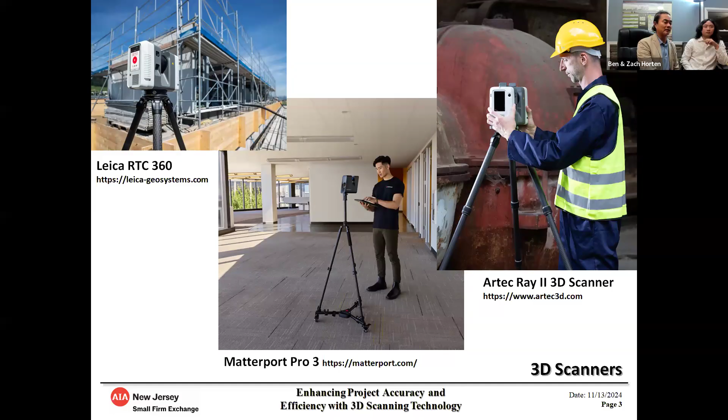Once you buy the scanner, there are various platforms available that make what's called twins, virtual twins. I think you may have heard of it, and I'll explain what that is a little bit more. There are companies like Matterport, Giraffe 360, Hexagon, and 3D Vista, and a whole host of other websites.

Giraffe 360, I'd say, is a little bit more popular in terms of the real estate world, where you could take a less robust 3D scanner and create that 3D tour, virtual tour that you see on real estate websites. A lot of times, if you go to realtor.com, you'll see certain houses or apartments that have the virtual twin you can walk through and see the entire space. That's hosted by companies like Giraffe 360. Matterport actually does the same thing too — they host a twin, and we'll show you an example of that.

Hexagon is, I think, more industrial grade type of stuff where they have scanners for scanning minutia details of equipment and things like that, as well as scanners you could use for scanning buildings. I found their services for architecture seem to be a little less comprehensive on their website, so I never really investigated too much with those guys.

3D Vista is one of the many companies that takes 3D scans, takes a cloud file, and converts them into a virtual tour you could have on your computer. You could actually walk through the space using their software, like a virtual twin of your building. But they don't have a hosting website where you can have a cloud file, like going to realtor.com and walking through the space on your own. You'd have to find some sort of hosting website to do that.

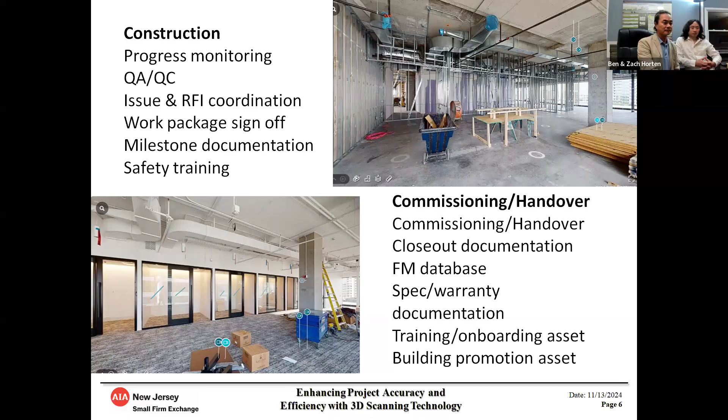I think that's kind of the quick overview of the technology, which I think is basic. It's a 3D scanner - there's all these benefits you can have for as-built as well as design phase, construction phase, post-construction phase. If you think more about it, there's a lot of benefits you can gain from that.

But today we want to spend the time going into showing you what a twin looks like, what a cloud file looks like, and the steps we take to take that scan, bring it to the office, and go through the steps of making it into an as-built floor plan.

What you're seeing again, on the top left corner of the image is a virtual twin, kind of the dollhouse view. On the right is an actual cloud file that's been imported to a software where you can review cloud files for drafting purposes.

Most commonly used software for bringing the cloud file in and drafting and tracing out the building plan is Revit and SketchUp. Our office uses SketchUp - we find that to be a little bit easier to train people on, so we've been exclusively using SketchUp. We're going to focus on how we import it into SketchUp and then go through the process of drafting.

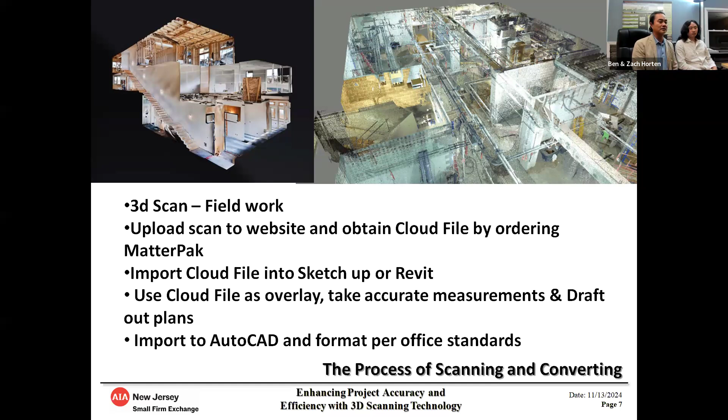Once we draft it out, we typically import that file into AutoCAD and format it for our office standards to create a nice set of floor plans. So we're going to walk you through and talk about 3 different projects we worked on.

This is an 80,000 square foot office building. It's a 4-story office building. If you can imagine how long it would take you to hand sketch out that entire space and create an as-built floor plan out of that, that's something we're going to show you.

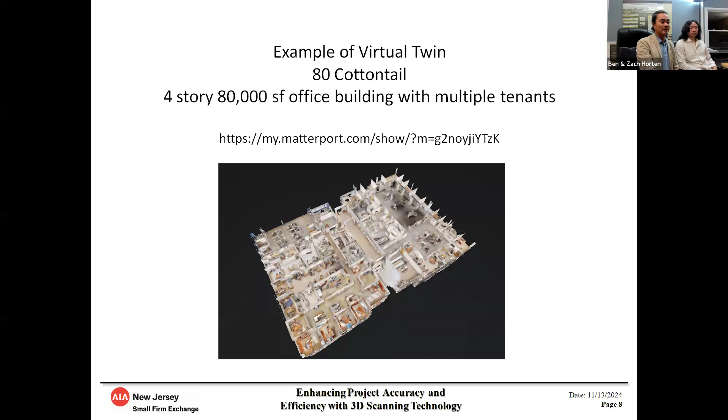So we did order what's called a schematic plan service that they provide. Believe it or not, each one of these floor plans costs about $15 a piece to order, so it's very cost effective.

Another project is a 2-story office building, 5,600 square feet. This one is a good example because the floor plan—this is something I found interesting about the 3D scanning.

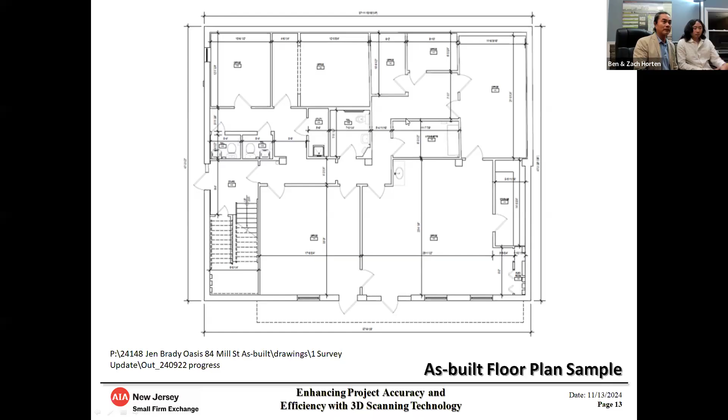I think twin is a good place to start. So let's start with the 80 Cottontail. This is what we refer to as a virtual twin—a 3D scan, and it's a virtual walkthrough.

Why don't we walk around the space a little bit? As you walk around, look up—could you look up? See all these ceiling details there? You can see all the details. Look down, you can see all the materials. If you do a good scan job, you could literally capture almost every little nook and cranny.

Keep on walking around. As you can see, we took multiple scans throughout the space so you can even go into that closet there. So you can see as you look around, we captured every little detail, and you can imagine once you go out and go back to that kitchen area.

You could tell looking at that window, look at the curved ceiling details, right? Imagine if you had to try to figure out how to measure that while you're on site. Look, there's these soffit details, window pockets. You can see the baseboards in certain locations. All those little things, it'd be almost impossible to pick up all those details if you were hand measuring those, unless you took an extraordinary amount of time.

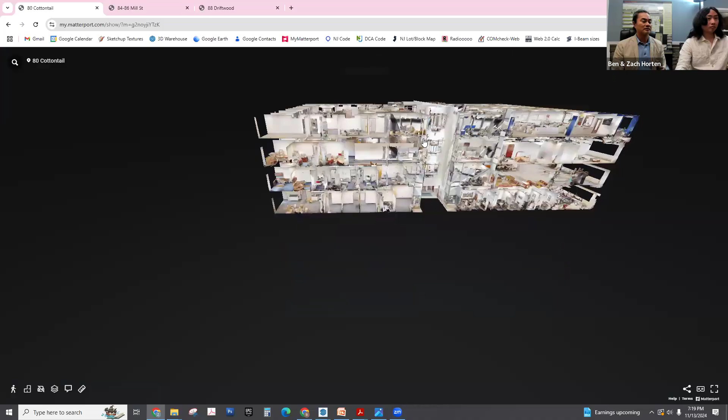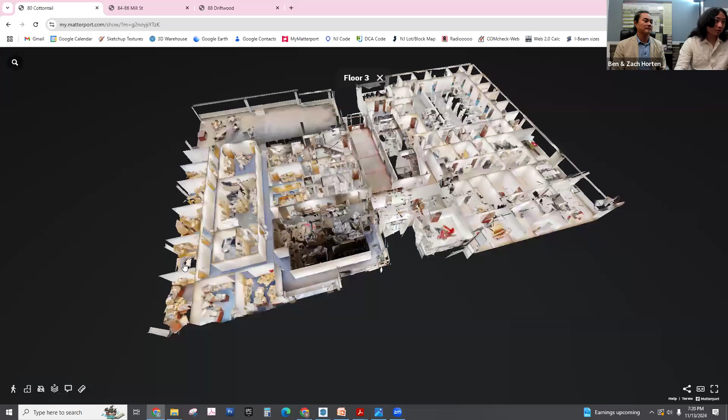And then why don't you show us the dollhouse view. So this is the same model. You want to explain that new feature that they added about the furniture? Yeah, so sometimes the spaces we go to are pretty cluttered. So let's see, this floor here, the entire room was filled with boxes, which makes it hard to sort of zoom in, see what's going on in there sometimes.

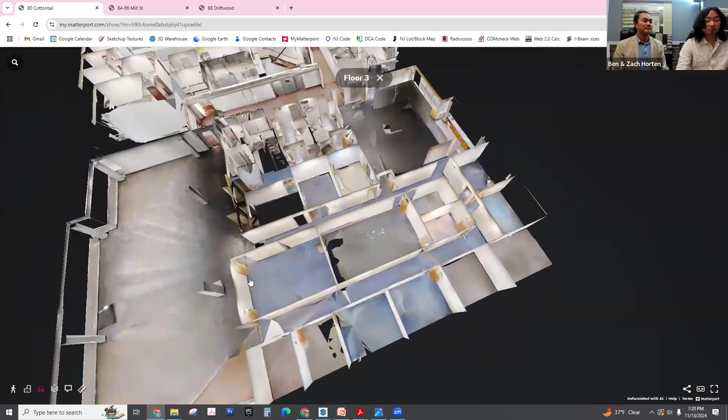One of the tools Matterport is currently testing is a tool to hide the furniture. So if you toggle this right here, you can see it cleared out all of the boxes in these rooms, which gives us a clearer view of the layout. Yeah, so this twin, and then why don't you zoom in and go into one of those rooms now? Yeah, it actually got rid of the furniture, right?

Could you turn the furniture back on now? Yeah, it's like magic. All that clutter. Why don't you go to one of these? Yeah, see all the clutter in that room? All right, there's that room. Let's take the

Yeah, it's like, what's that commercial where they make all the garbage disappear? Yeah, you just point to it and it disappears, and this is what it's doing. I mean, just technology at its best, I think. Yeah.

So you can see, this is like a 4-story building. We scanned all 4 floors. It stacks it, so you're able to measure the floor to floor height pretty accurately because it 3-dimensionally scans it. And we scan the stairway pretty in detail so that 3-dimensional measurement is accurate as well. So you could get pretty decent floor to floor heights.

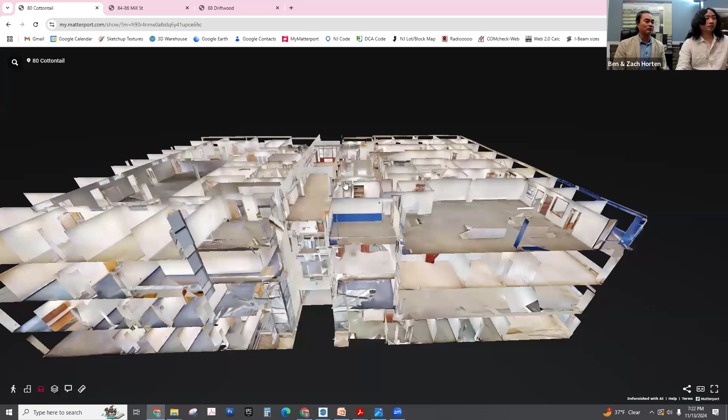Again, when you walk the space, you saw the ceiling, so you could actually flip this and just look at the ceiling layout also. So we use it to also create a reflected ceiling plan as well. But you can see the stairwells. Why don't you talk about the process of scanning and what you do to get an accurate scan and some of the nuances that you should be aware of?

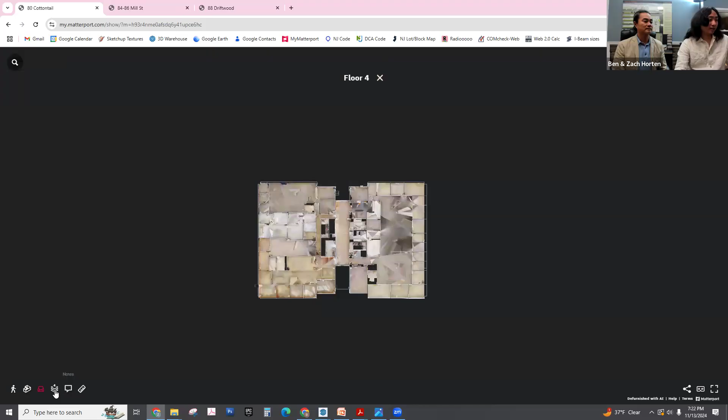Yeah, so when you're scanning the space, since it's scanning in all directions, you have to pay attention to what's above you and what the camera can see. So if we're trying to figure out how deep these cove lights are, you have to make sure the camera is positioned far enough back around here to capture all the surfaces. Yeah, capture that back surface, the ceiling, and these.

And the doorways, sorry. Yeah, you have to actually go into the doorways and set the scanner up in multiple positions, so you could capture all sides of the door. If you want to get that door jamb accurately, you got to scan both inside the door and outside the door.

You don't have to if you were doing just a virtual twin, let's say just for quick touring purposes. A lot of times realtors, they'll go into a room, maybe set up the camera in the middle of the room and do one scan. And that's enough for people to be able to look around, see what the room looks like. But for architecture, you have to be able to capture all the little dimensions.

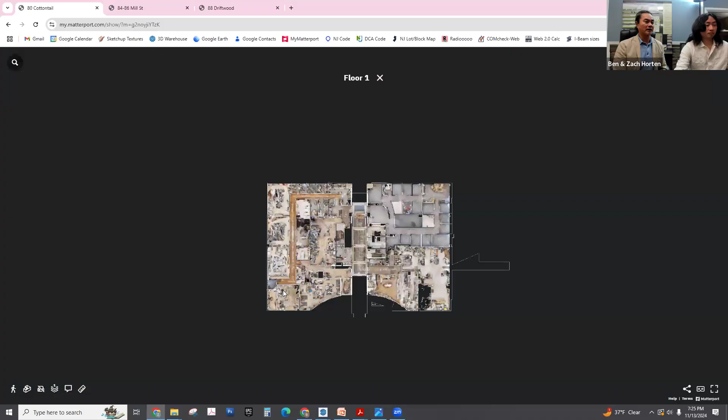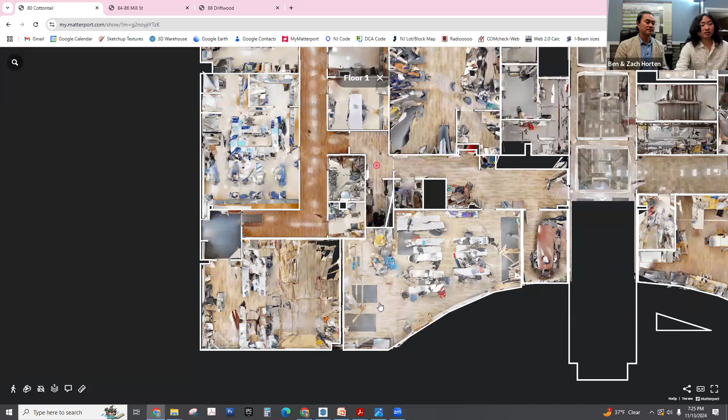Yeah, so you go through and do the scan. Once you do the top-down view now, so if you look at the floor plan, how many scans do you think you did in each one of these bigger rooms? In these bigger rooms, I took about, I think 8 for this one, since we had all those ceiling details in here that we had to be mindful of. Yeah, so you went around the perimeter of the room to capture all those three-dimensional aspects of the exterior wall, right? Yeah. And you took those extra steps just so you could capture those extra details, right? Yeah, so you have to position the camera to be able to capture this pocket in here.

Hey, could you do that magic of turning off the furniture? I want to see what it looks like in here. Yeah. Ooh, got rid of some of the walls too. Yeah, so some of the stud walls disappear, looks like, but that's pretty cool.

Yeah, so in some of these bigger rooms, to capture all those details, like one side of the mullion to the other side of that mullion, because you were able to scan both sides of that mullion, we could actually get a cloud file that shows you the exact measurement of that mullion, right? Yeah. I hope you guys understand that, to get that mullion, instead of having to measure every single one of those mullions, because you scan both sides, now you have a three-dimensional scan of that mullion that when you convert this to a cloud file, you could actually go in there in your software and measure the dimension of that mullion. And you could get an accurate measurement of the height of these mullions, the window heights and things like that.

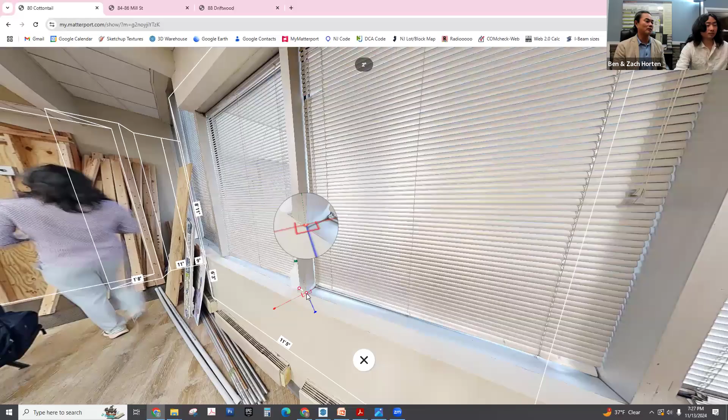The twin model is actually good because with this virtual twin, you could actually do some measurement as well, right? Could you show that feature here? So you do the measurement tool, and it gives you some basic measurements, but you could actually measure from one point to the other to get an approximate measurement. Now, these measuring tools, I found out it kind of rounds off a little bit. So it gives you a good general sort of dimension. So approximately the windowsill, you might be able to say these are like 4 foot 6 inches wide, from mullion to mullion. But they do round off on this part.

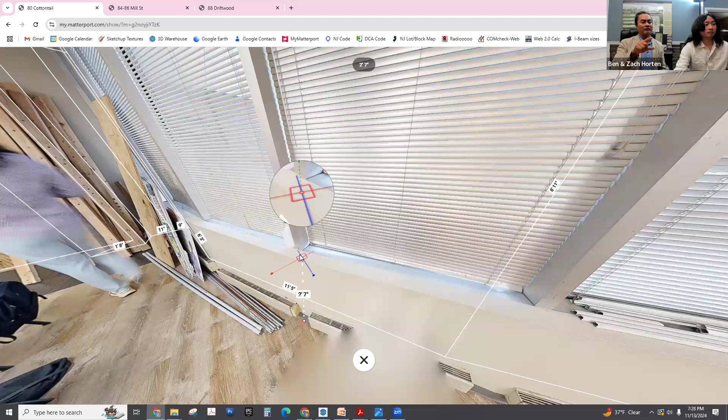But the cloud file, it's accurate to almost like a 16th to 1/32 of an inch. So on the cloud file, it's much more accurate. Whereas in the twin, this is just giving you a good estimated dimension rounded to the nearest inch or so. So this is an interesting tool to have. Okay, so why don't we go back to the plan view?

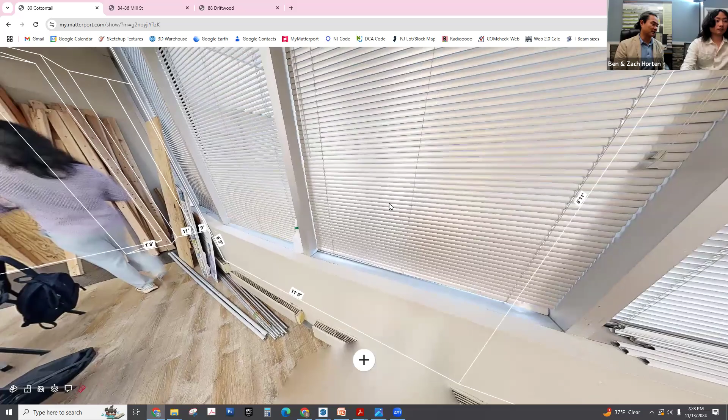All right, so you can see the benefit when you do these scans. Each one of these scans, can you tell them how long it takes? Each scan only takes about 15 seconds, excluding the time it takes to move it around. I found that working in a team helped a bit because you can have one person just moving the camera around while the other person keeps out of the way and starts the scans. Mm-hmm. Yeah, so on a larger job, you could do it with one person. Sometimes we've been doing it with two people just to test it out, doing it both ways.

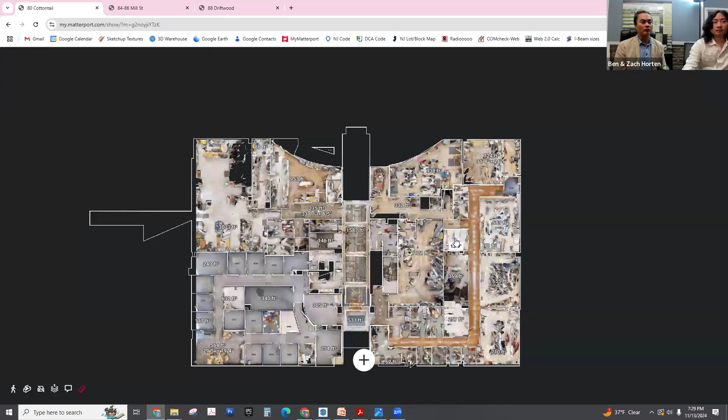But this project was a 20,000 foot floor plate times 4, 80,000 square feet. And how long did it take you to scan the whole thing? 3 days. 3 days of scanning. I think comparative to what it would have taken if we were to hand measure everything and sketch everything out, on top of the fact that we probably wouldn't have been as accurate, my guesstimate is that it would have probably taken us at least over a week to field measure, field sketch, and measure out everything. And most times, with a building this size, we would have gone back a lot of times because we would have missed a lot of things. So I think there's some benefits there.

And you know, like I said, the twin is great because you could actually provide this link to a website. It's like a hosted website that's on the cloud, so you could provide that link to your client, and then your client could kind of walk through the space themselves and look at things. The contractors could look at things too, like an as-built condition when they're bidding on a project, and look at what's there, as opposed to having to go to the site itself. So I think as we progress, people are going to see more and more benefits to using these twins.

Now, why don't we jump from this one? I'll give them an example of the house, the driftwood house. Now, go ahead. So this is a 3-story house. And again, you're looking at the dollhouse view of it, but why don't we start from the street and kind of walk us through the house real quick? Yeah.

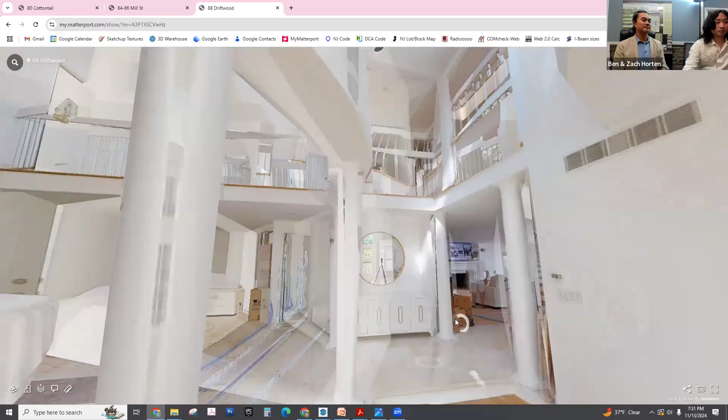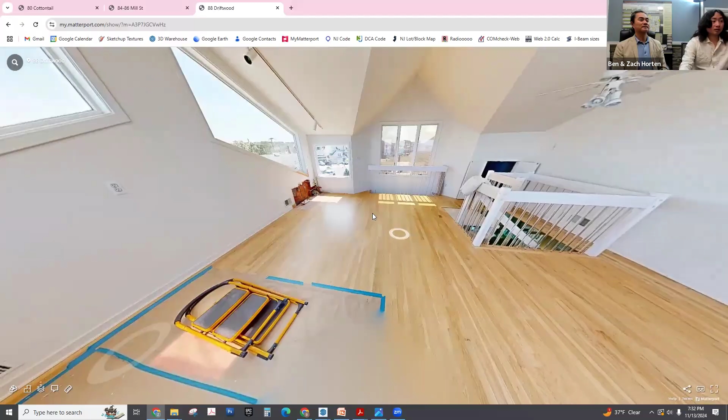Normally 3D scanners also have trouble with these mirrors, since it ends up perceiving the space to be a lot larger than what it is. So the thing that's also helpful with Matterport is they have a tool that lets you mark the locations of these mirrors, and that helps a lot with the accuracy of the scans. So all those circles are scan points, right? Yep. It was hard to get the scanner to fit on these stairs.

What did you tell me about doorways? Like a lot of times when you scan, you want to scan with the doors open so you could get the wall thicknesses too? Yeah. One of the scanning practices is to scan on both sides of the door. So that way you can get the location of these edges of the door, and then when you get this combined with the opposite sides, that allows you to get the thickness of the walls more accurately, right? Yep. These closets, you can figure out the size of the gap that's between them fairly quickly.

Yeah, when we field survey, we always measure the jamb dimensions on both sides of the doorway. So make sure the chase walls, if there's any chase wall, we could find those. A lot of times it's hard to tell if there's a chase or not. But I think if you do a good scan, it picks up all those things that you didn't really notice when you were at the site. Mhm.

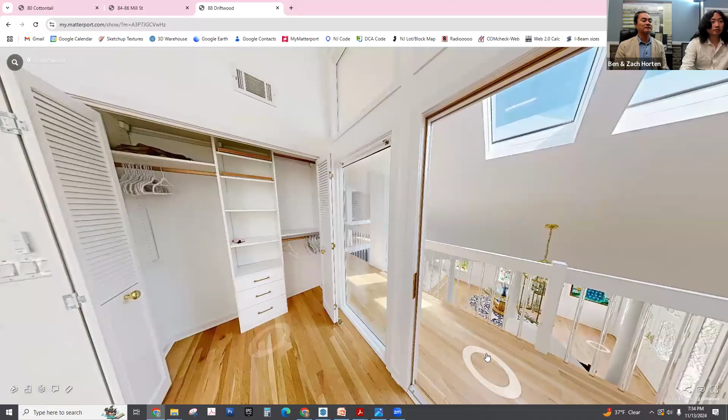Now let's go to the cloud file. So since we looked at 80 Cottontail, which was that 80,000 square foot office building, we're going to show you what the cloud file looks like. And can you explain the process after you scan? What do you do with the file, and then how do you get it into the cloud? Yeah. Okay.

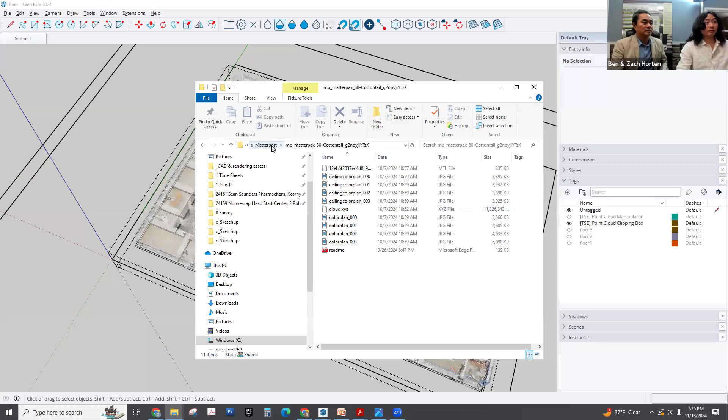So when we get the cloud file from Matterport, it comes in a format called XYZ. Let's see, show them the folder. Okay. This one. So yeah, it comes in as this XYZ file, which contains all of the 3D data. But since that doesn't natively work with SketchUp, we have to convert it to this E57 file before we can import it. Yeah, but that allows you to bring it into SketchUp.

But basically, I think the step is once you've scanned everything, you bring the scanner to the office, you connect to the internet, or you scan it onto your app on your phone, right? So we pair a device with the camera. The camera sends the 3D data to the device, and then from the device we can upload it to Matterport. Yeah, so you could either use a smartphone or an iPad. We've done both. We loaded the app on our smartphone and on our iPad. One of the things that you found out early on was take an extra battery, right? Yeah, it drained battery pretty fast.

Yeah, so you're scanning with your phone, and if it takes more than a couple hours, you're going to drain your phone battery pretty quickly. So it's good to take extra backup battery to charge up your iPad. That's a good tip.

But once you scanned it and you have it on your device, the app is on your phone or your iPad, that connects directly to the internet. Our iPad is wireless. We don't have a cellular iPad. We have a regular wireless iPad. So once we bring it back to the office, we upload it onto their website, and we order the cloud file. So they go through that process of taking the scan and they convert it to this cloud file, and they email it to you, or they actually put it in your account, and you could open up the account.

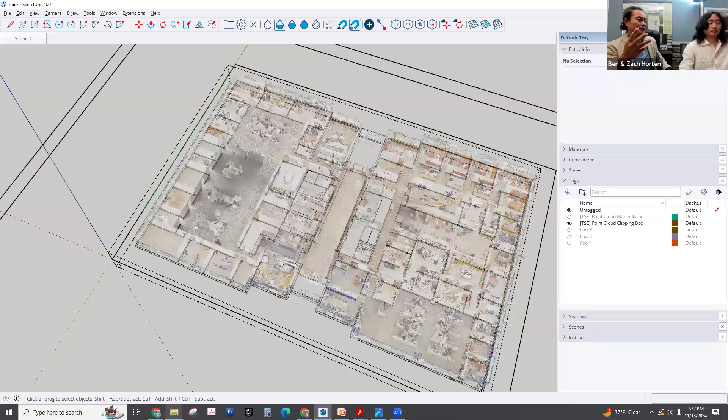Can you go to the account file folder? Yeah, show them what our account folder looks like. So we have an account set up with Matterport. It's a subscription service. Depending on how many projects you guys anticipate doing, you do the subscription. And it allows you to store a certain number of projects. So this is our account website.

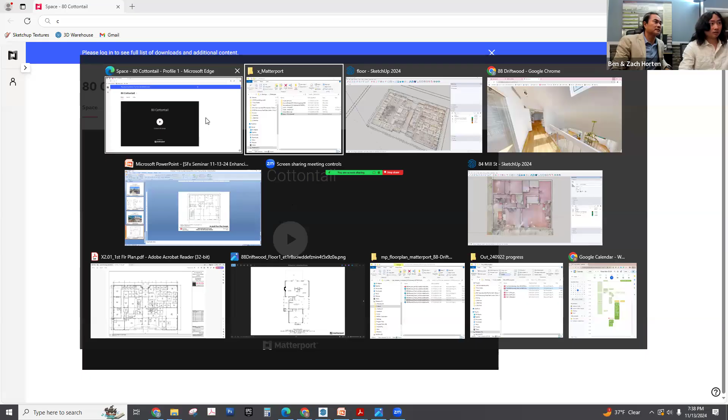And once you go to the project folders where all the projects are of different spaces, go to the root. No project folder? Yeah, go to our folder with all the spaces. Just go to matterport.com. This has the login on it. Just a bit fast. That's mine. Yep. Okay.

So once you go onto the Matterport website, it stores all your project scans on the cloud, so you can access it anywhere. This is our account. You can see all these different spaces that we scanned. This is loading up. So if you scroll down, you can see these are all the various projects. There's about 26 projects we did so far.

And you come to this website, once you scanned it, it puts it into your account. And then if you order what they call the Matter Pack, the cloud service, where they convert the file to a cloud file, you come here and you'll be able to download it onto your computer. So once you download it, then you could import that file into either Revit or SketchUp. In our case, it's SketchUp.

That Matter Pack currently costs, for each scan to convert it to a cloud file, about $59, which is a fee that you have to pay. And I think that's the reason why they were able to keep the price of the camera down, because they're hoping to make up the revenue with the services that they provide. And I think it's a reasonable price point, $60 to get the cloud file, considering all the labor savings that we're seeing.

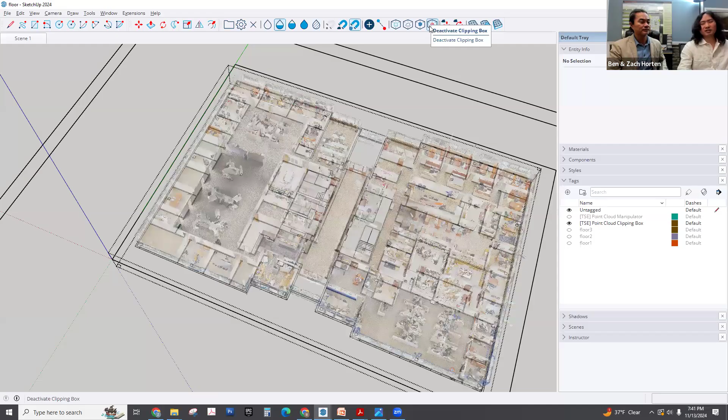Yeah, so a lot of times after you're done scanning, you order the Matter Pack, let them process it. Next day when you come to the office, it's usually there ready for you to go, right? Yeah. And then this is the cloud file that you get, that you import into SketchUp. We're not going to do that right now, because once you open up SketchUp and insert the cloud file, that process takes about 5 minutes sometimes, depending on the file size. Usually shorter, but this one was a pretty big one, so we'll all sit here for 5 minutes waiting for it to load up.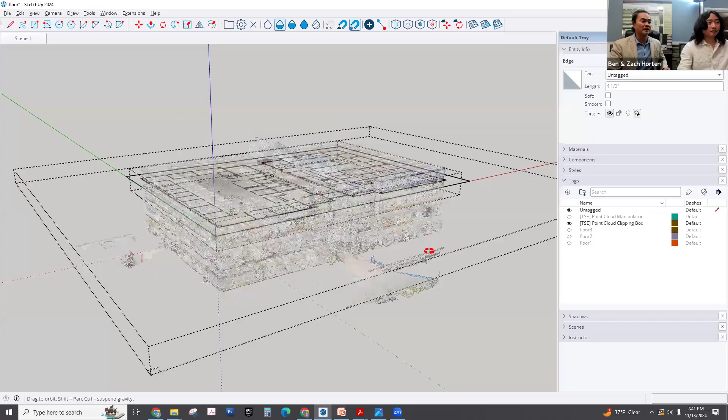But he already loaded this up, the entire floor plan. You could see this is kind of what it looks like in SketchUp. You got all the levels, and obviously if you're familiar working with SketchUp or Revit, you could crop it, isolate each of the floors, and you're able to take measurements. Once you're looking at the overall view, everything looks kind of fuzzy. One of the things people had a hard time getting used to is once you insert the cloud file, how do you work with it?

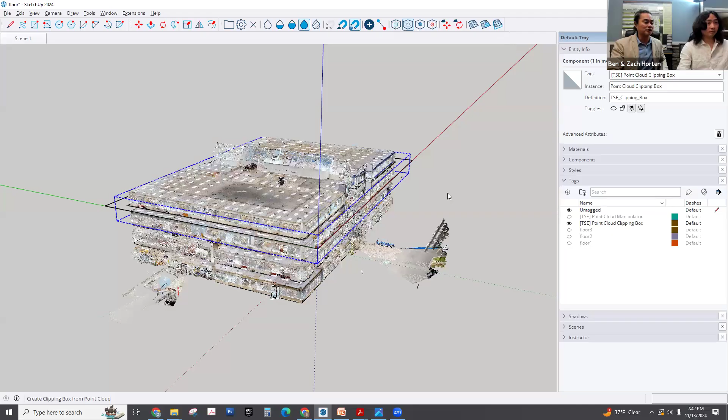Just visually, it's a little different. It's fuzzy, not sharp like the Twin, but if you zoom in, why don't you show how you could zoom in and snap to the points? So...

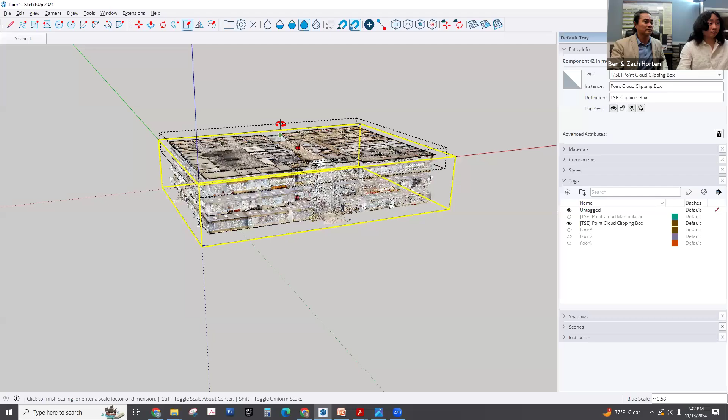One of the things you can do is create a clipping box, which lets you trim down the scan so you can get to the floor you're focused on. So from here we can cut out the ceiling to see inside the 4th floor and go down until we get to here. And...

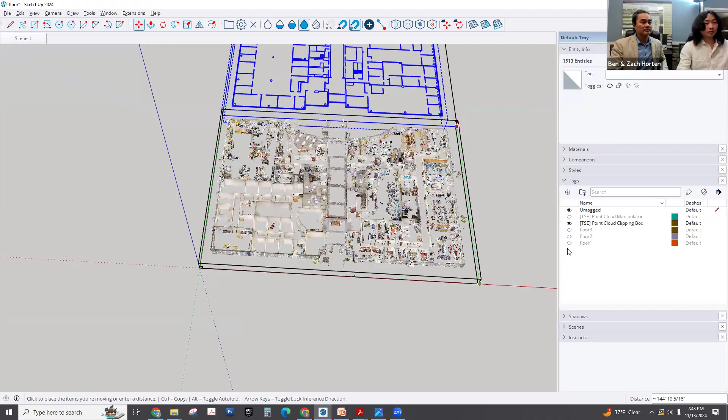The line work you're working on, that was the 4th floor. Yeah, this is the line work for the 4th floor. But... this out of the way. Where that went.

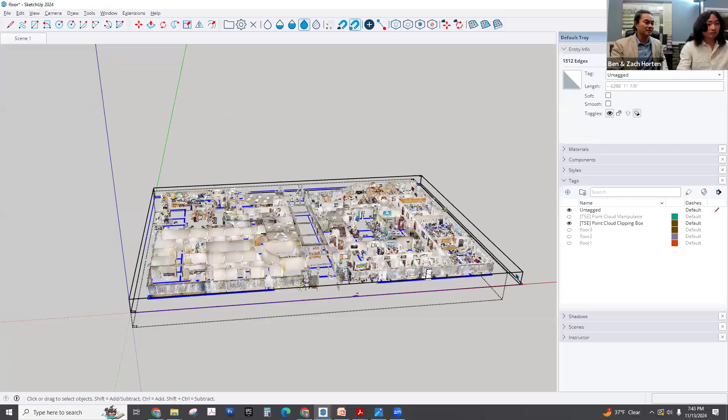Okay, why don't you zoom in on the cloud file so people can see what it looks like a bit more. So it looks fuzzy at times, but if you wait, it generates and gets a little sharper. But you can see there's thousands of cloud points, that's why they call it the cloud file.

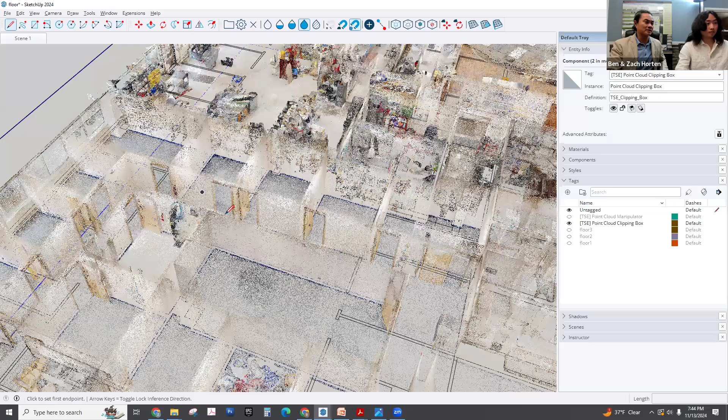Each wall, you have thousands and thousands of points that you could snap to. And SketchUp recognizes those points and can lock into them. Show them how you would draw a line to represent a wall, then draw another line perpendicular to it. So you can start at a point and lock the line to an axis.

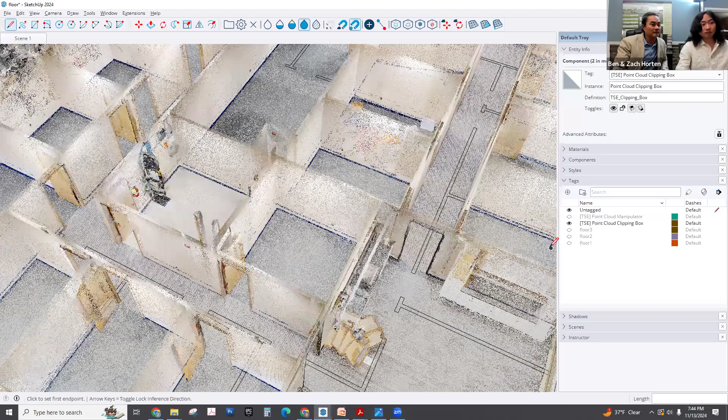This floor plan doesn't seem to line up though. Yeah, I don't know where the first floor went. I think you cropped it out and raised it. You used the... just draw a new line there.

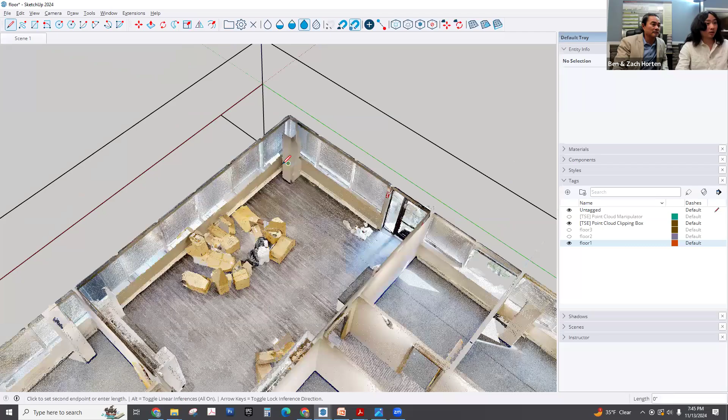Yeah, so you can lock to the axis and drag along the wall, because if you're looking at this, the indicator there, when you hit the wall, it stops and snaps to it. So we can draw from there, snap to this wall, and that locates the corner of the room. And there we can go, from there we can go here, here, here. Yeah, and now we have that room boxed out.

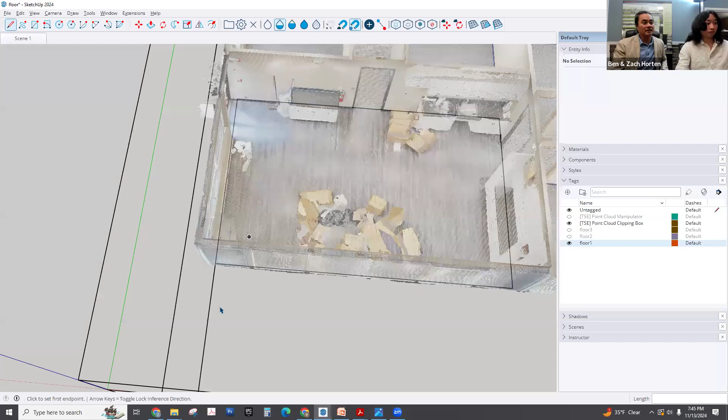I think you just saw a quick demo of how the software is able to recognize those cloud points, so you could use a procedure to snap to each one of those walls so that it's perpendicular to each other. Sometimes the wall might be off by a fraction of an inch, but in general, as architects, we would represent that as a straight wall.

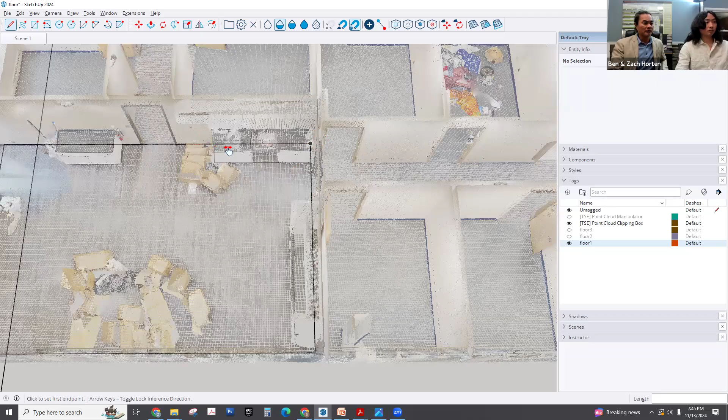Once you have that first wall drawn, you could offset that line by the relative thickness of the wall, right? So why don't you show them how you offset that? Yep, so take this, use the offset tool, and that'll give us the thickness of this wall. We got to snap to it now. Yep, that's about 6.5 inches.

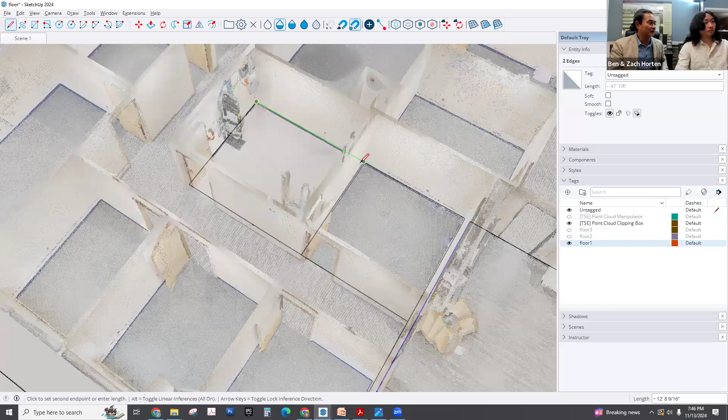And we can start drawing the next room. Yeah, so that's something you make a value decision on, right? When you get the measurement, it might tell you it's a fraction of an inch off of 6 inches, so you round it up to 6 inches. Or if you get a wall that's 5 inches, it might measure 4 and something, but you use judgment to say that wall is typically nominally 5 inches, so you'd offset it 5 inches or so, right?

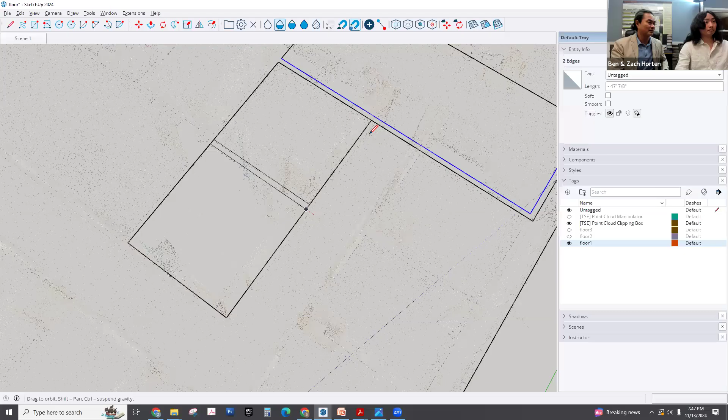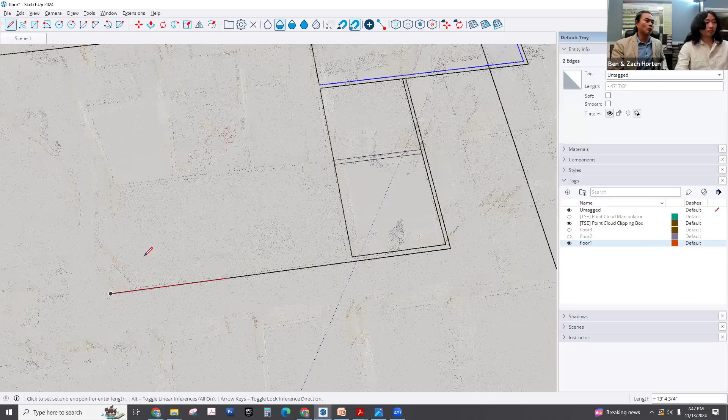Yeah, we had cases doing this method where certain walls are a lot thicker because there's a chase, and you're able to measure both, snap to both sides of that chase wall so you could get the accurate dimension of it, right? Yeah, again, you do have to make value decisions on how thick to make that wall.

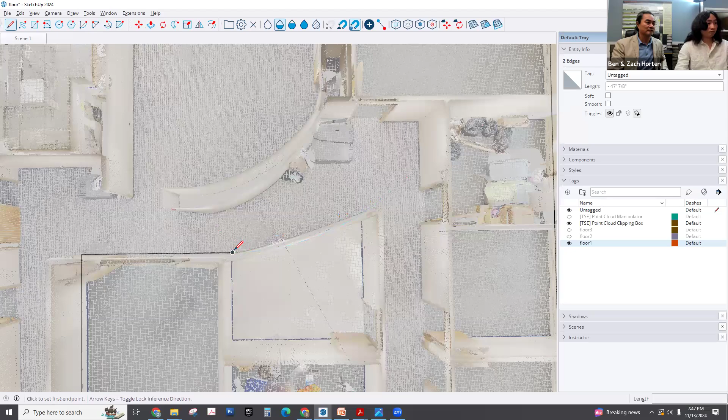And then now you get a situation like this where you've got some curved or segmented wall, right? Yeah, and it does give you an idea of how you can approximate it. So using the arc tool, we can go here to here, increasing a bit. That gives you a decent approximation of the wall curve.

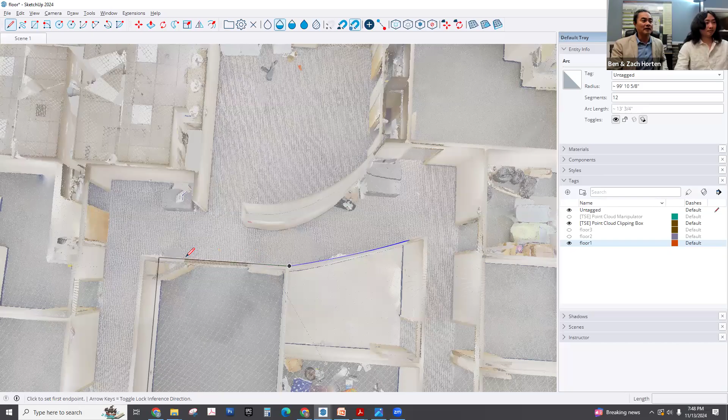Yeah, he's going on the fly a little quick for you guys, but you could actually take a bit more time and get that more accurate. But I think now you should show a planimetric view of what you just drafted. Yep, the straight plan view, because you're looking at things three-dimensionally.

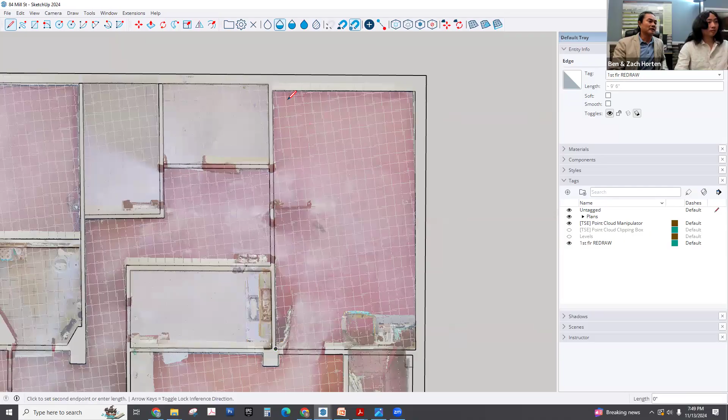Now this one was that 5,000 square foot building. You can see all the walls were traced out, but if you look at that wall over here, showing the wall that's askewed. If you were in the field measuring these things, you wouldn't recognize that was actually askewed, but you can see right now that's off from one end of the lower left corner of that wall to the upper part of that wall. That's like off by several inches.

Why don't you draw that line and show what the distance is there? That would be about 5 inches off. So you can see that wall was off plumb by 5 inches, orthogonal to that bottom wall.

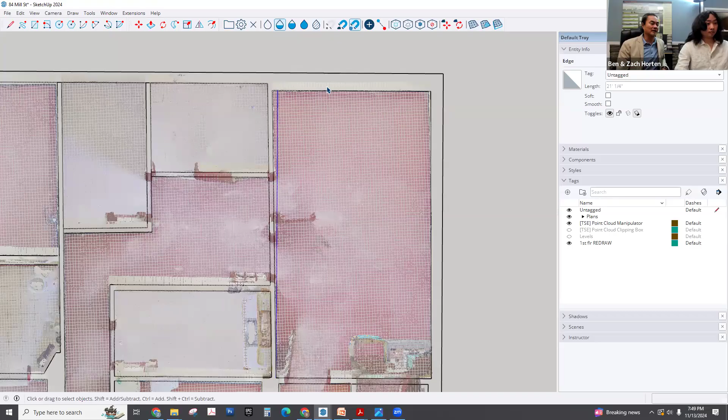And then an interesting thing about this building was that you had certain cases where the walls were furred out a lot more along the perimeter, and certain walls where the walls were actually bare concrete. The nuances of all those dimensions, we were able to capture that by looking at the virtual twin, looking at this cloud file, and recognize all those little differences in the wall thicknesses.

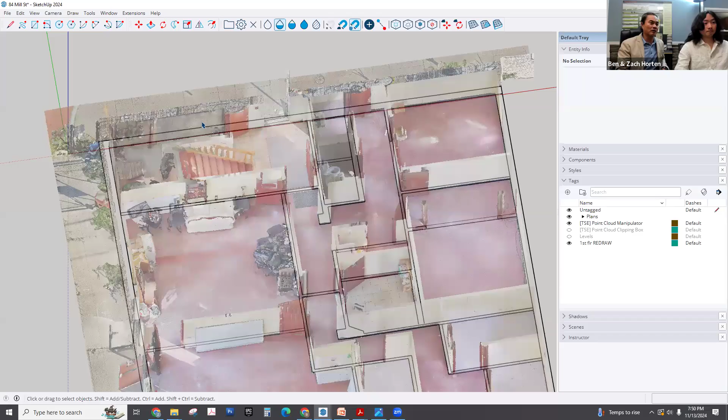You can see here, why don't you show them that thick wall where the bathroom is here? You can see how that bathroom wall was a lot thicker on the one side, which was kind of strange. You'd always think that the wall that the toilet is up against would be thicker, but in this case, it wasn't built that way.

But we were able to find all these chases where chases were built. You can see all those little dimensions there, like where the column is, all the measurements you would have to take to just measure all these little differences around this column here. The scan was able to capture that.

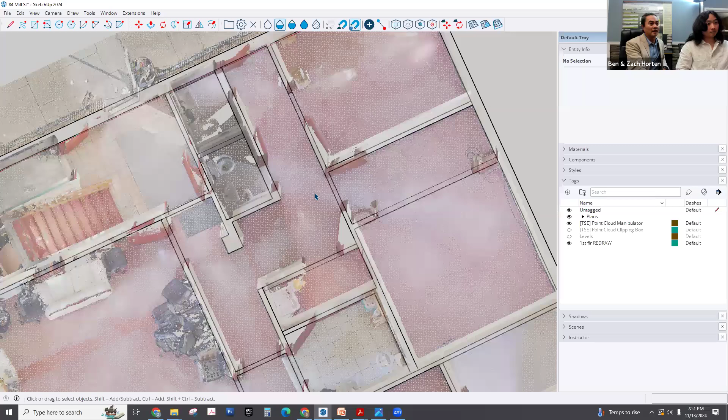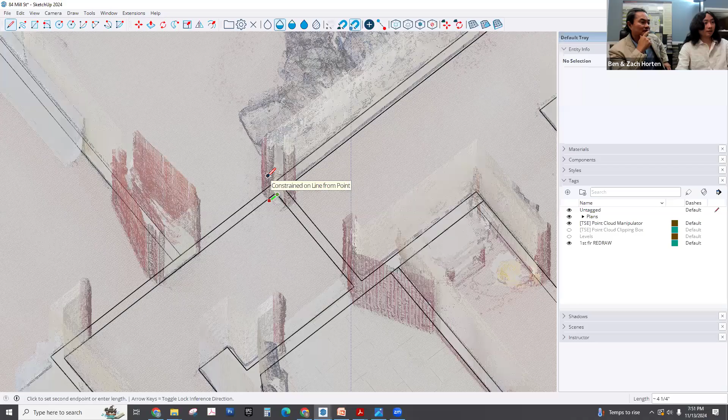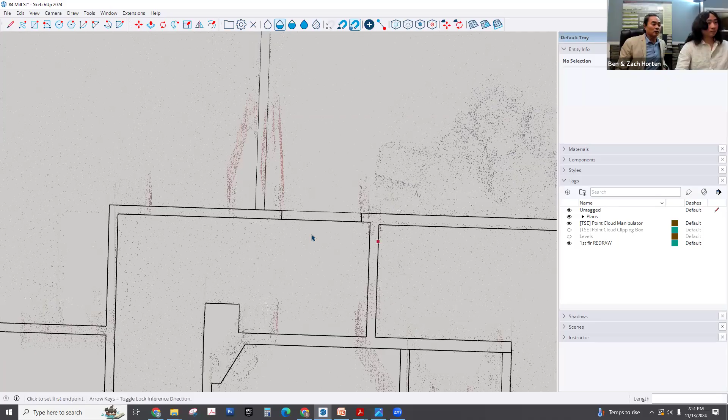Once you trace out the walls like this, and locate all the basic things, the doorways - I think you do the doors on AutoCAD, not on the SketchUp? Yeah, on SketchUp, normally I make the openings in here. So you could get the jamb locations, right? Yeah, we try to locate all the door opening locations here because we get the jambs more accurate. And then once we bring it into AutoCAD, then we'll insert all the doors.

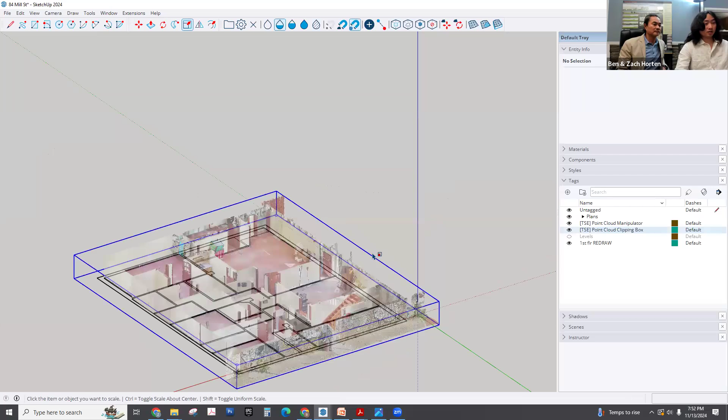What about the windows? How do you handle the windows? Similar way, we can raise this box up a bit. So in a similar way, we can mark out the opening of the window. So he just located that window opening, snapping to those surfaces using this cloud file.

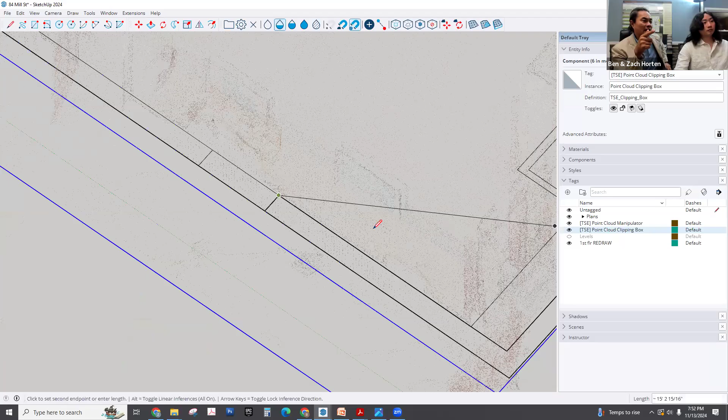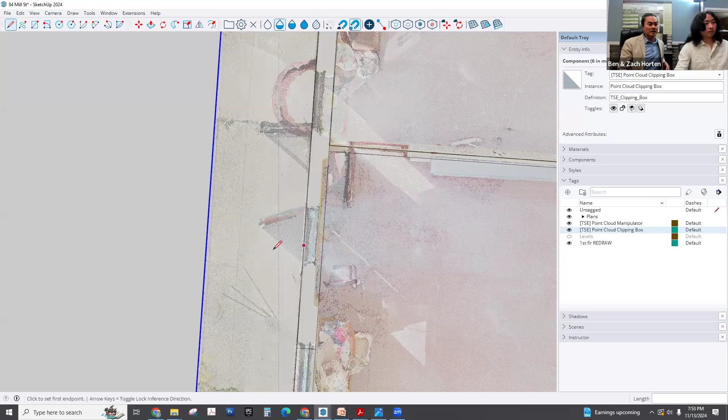The other thing that's interesting is because you scan both the inside and outside of the wall, you could get accurate wall thicknesses too. Yeah, the exterior walls - so that's been helpful. Here the wall is actually thinner. So we're just showing you a different stage of the drafting. Obviously, all these little nooks and crannies where the walls are thinner or thicker, we draft that all out.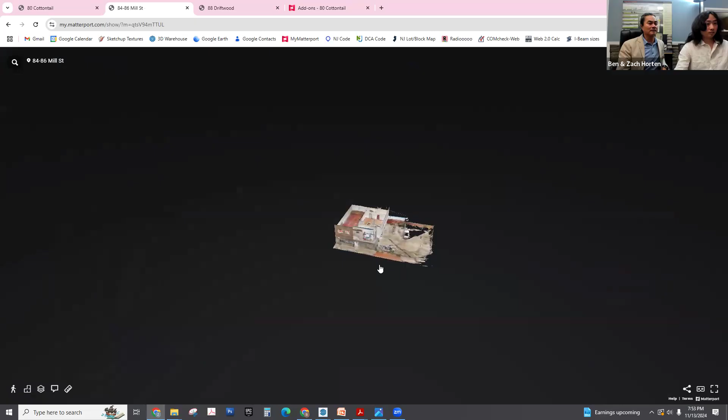Why don't you go to the twin of this one so they can kind of see that room? So this is the twin of that building that you just saw the cloud file for. It's a 2-story building. You can see that exterior wall there. Going through that door, you can see that doorway was once a garage door that they infilled with a stud wall and stuccoed it, and you can see all the little dimensional differences there.

So inside of that exterior wall was CMU. Let's go to the right of the space, and keep going all the way to the opposite side of the building. You can see all of a sudden the exterior wall was wrapped with gypboard there. And then if you go to the inside of that, underneath that stairwell, you can see there now it's bare concrete block. Because you scanned all this on your cloud file, you could actually measure those thicknesses, how much of that fur out wall was.

Yeah, you can see that - all those dimensions that you see, you could actually measure on your cloud file. And we caught all of this, all of these details, in just 3 scans.

The other thing that's interesting that we haven't done yet is you see all those meters. If there was an electric box, meters, you could actually notate this twin, indicating what those are. Engineers could add notes about like the panel size, if it was an electric panel, all the details for it. We haven't quite used that yet, but I think it's coming.

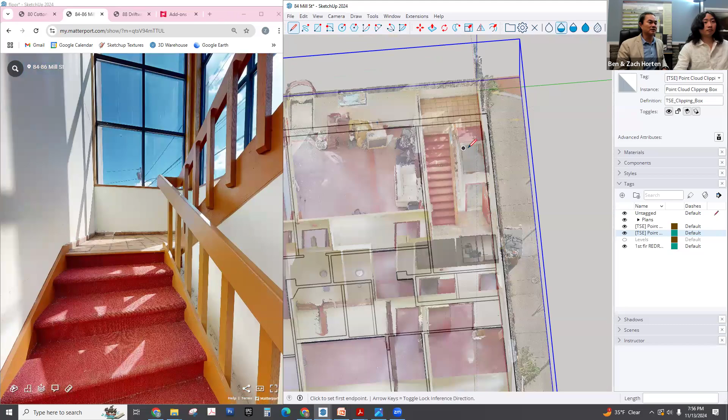But you could literally get into that cloud file and measure all those little dimensions, once you zoom in and look at that handrail.

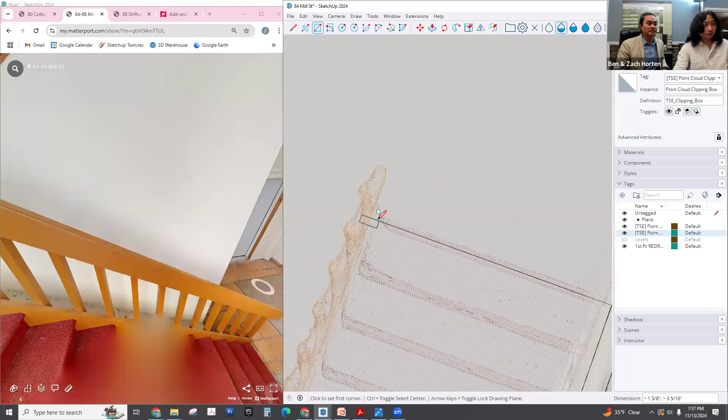So you can measure those dimensions, little dimensions there. Yeah, sorry, I'm not much of a speaker.

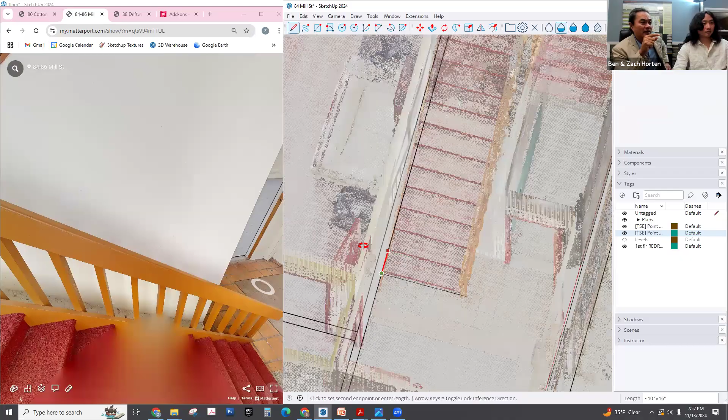I think with the cloud files you can see, you could go in and snap to surfaces to get dimensions. You could actually measure the exact dimension of that tread. You can measure the riser heights too.

I think the first job you did, it took you a little bit longer, but by the time we did our 3rd job, you were flying through this pretty quickly. It takes a little learning curve, zooming around with this cloud file. It could be disorienting at first, but once you get used to it, it seems to be quite easy, right?

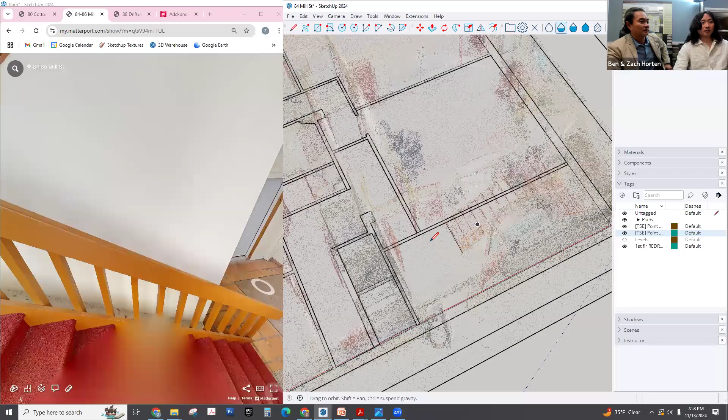And you've been training everybody in the office with that too, right? What do you think the learning curve is for people? I think the biggest learning curve is probably whether you're familiar with SketchUp in the first place.

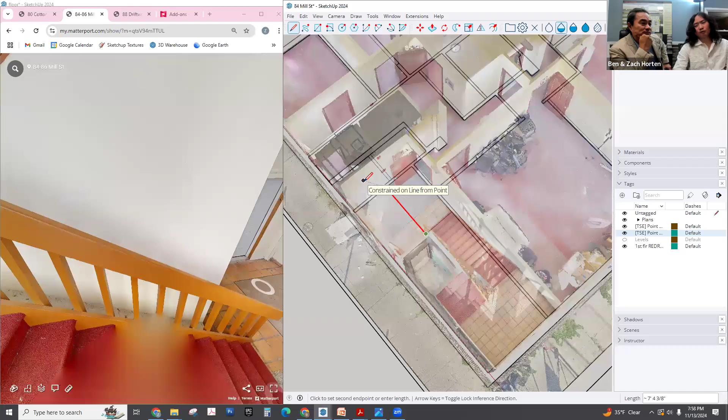Because once people understood how to maneuver with the SketchUp camera and snap the lines properly, I think they were managing to do it in about... I think Victor got this entire floor done in like an hour or two.

For example, Kira, she never did SketchUp before, right? Right, she never did AutoCAD before. You had her learn to do the SketchUp, and then once she scanned it, she brought it into the cloud file and started sketching it within 2 days - she was up and running, right?

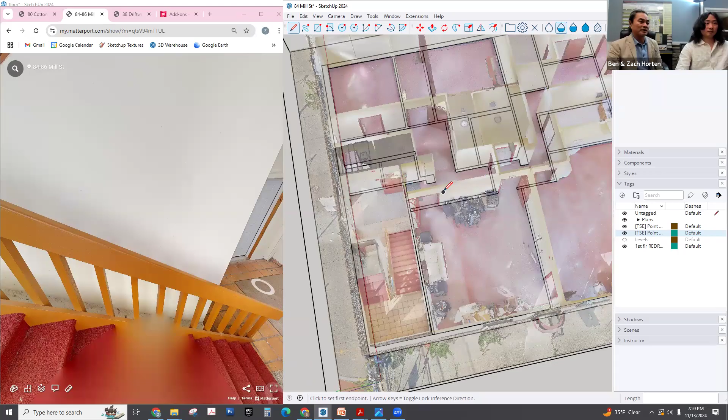Right. Yeah, so the learning curve is very short, I think, with this, especially with the younger generation - they're so used to zooming around these virtual worlds. They play with these virtual games all the time, so zooming around SketchUp is almost intuitive.

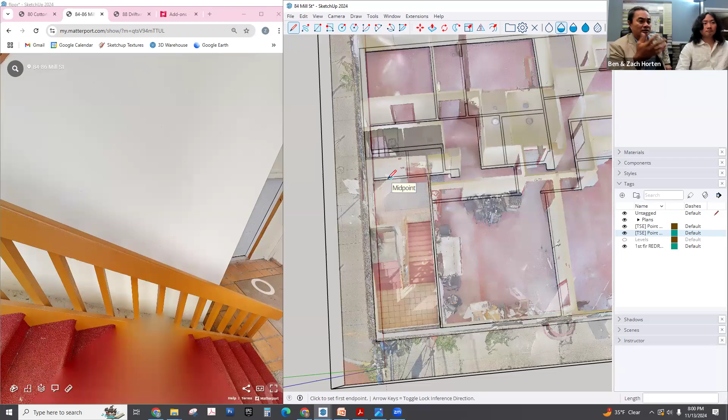Kira, she's never worked with SketchUp before, she did AutoCAD, but she was able to jump in, open up SketchUp, and start preparing these as-built drawings pretty quickly.

Now let's go to the actual floor plan that we drafted, the final floor plan. So, for example, this is that small office building. We were able to draft out all the door locations, all the wall locations. You can see the angle walls here - like this wall, you can see is skewed.

So is this wall - normally if the wall was off by a 1/16 of an inch, you're not going to show that skew, you're going to just draw it straight. But these were so severely off, we did have to draw it because it would impact any renovation work you would do here.

You could see how this wall was much thicker here. You could see how all these nooks and crannies around this column were identified. These chases were identified, this thick wall was picked up. This is something you might easily miss - the fact that this wall was the actual thicker wall rather than this one.

The scan was detailed enough that this entire wall was concrete block, as you saw in the twin, but when you got to right here, there was an actual thin layer of chipboard here, here, here, but then when it got to the back wall, it was a little bit thicker - they used a thicker furring strip. Over here, they actually put a full stud wall. So all those little nuances we were able to capture.

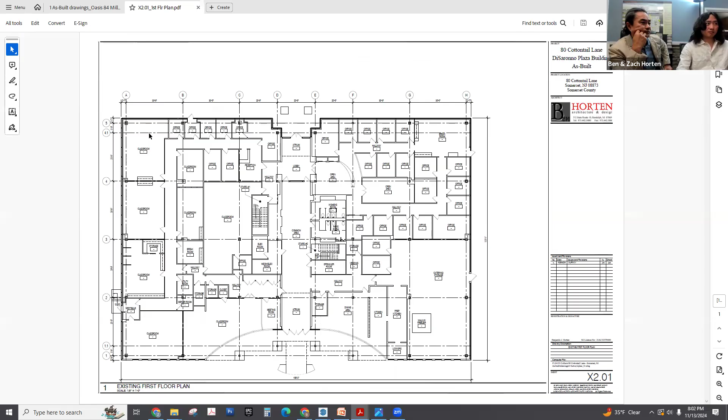Yeah, for some of the other buildings, it's pretty hard. You have to extrapolate where the column locations are based on the pillars around, or the walls. Because you surveyed all those walls, you could kind of guesstimate where the structural grid is. Some of them you could tell by looking above the ceiling where they were located, but even the hidden ones, like this hidden column over here, this was somewhat hidden, but there was enough of a bump out that you could tell there was a column there. Once you drafted everything out, you had to make an educated guess where the columns might be located and determine this grid.

Now, this is approximated, but I think it's pretty accurate, the spacing that we determined is the structural grid. And the window mullion spacing was all very accurate too, right? Yeah. You get a sense of how the window mullions were spaced out based on the cloud file. Again, that's something a lot of times we'll just spend hours drafting out, sketching and measuring in the field.

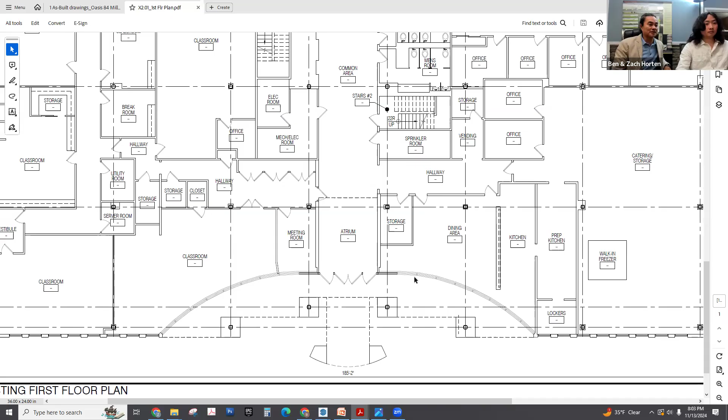All right, so I think we just walked you through that whole process: going to the field, scanning, taking the file, uploading it into Matterport cloud service. They convert it to a cloud file. You take that, download it into your computer, bring it up in SketchUp or Revit, and draft out all the walls, door locations, then import it into AutoCAD, and give it the finishing touches with the final door locations and identifying where the structural grids are.

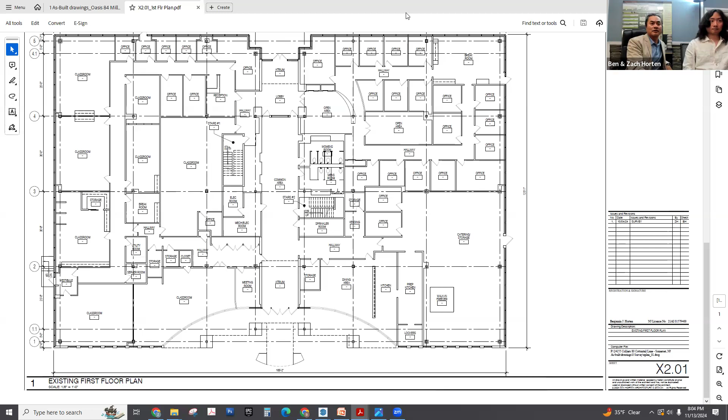That was great, I appreciate it. I love that you actually got into the weeds of it, showing everybody how to do it, not just kind of the top down approach. So thank you so much.